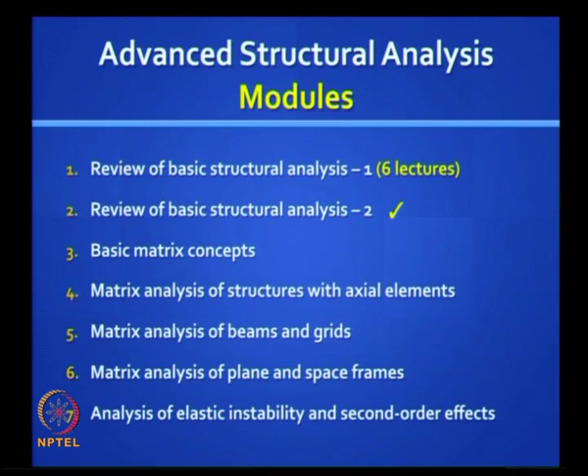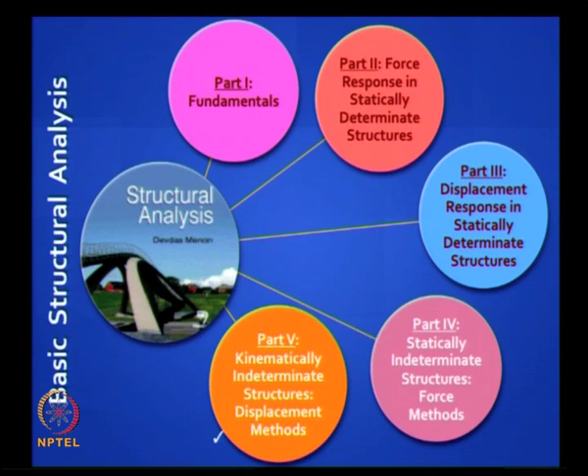We will be covering displacement methods, which we started in the last session. We will continue with the introduction and get into slope deflection and moment distribution methods.

This is covered in part 5 of this book on structural analysis. If you recall the last class, we learned about the meaning of the stiffness matrix and how to derive it from first principles. Now, can you write down the stiffness matrix for this, given that all three spans are identical, meaning they all have the same L and same EI? What will that matrix look like?

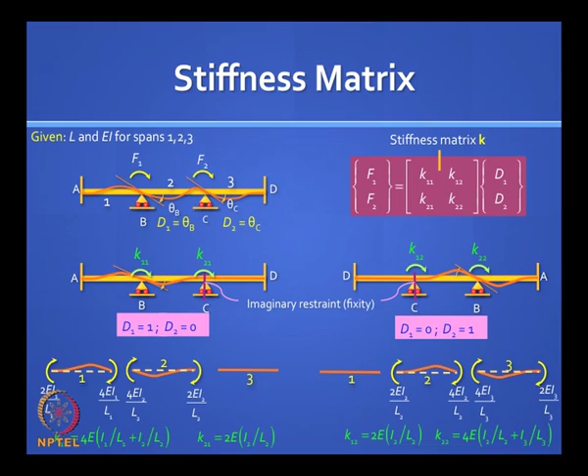Can you do it? It will be a symmetric matrix. What will it look like?

That's right. Now let's solve a problem from first principles. Let's take this beam and say it is subjected to F1 equal to F2 equal to m naught, two concentrated moments applied at the joints B and C. The challenge is to analyze this beam completely, meaning find the bending moment diagram after finding the unknown rotations d1 and d2, theta B and theta C. So the stiffness matrix for this is this.

I presume you got this from the last slide. How to proceed from here? F1 is known, F2 is known, both are equal to m naught. So just invert the matrix. Will you find out theta B and theta C quickly?

So inverting a 2 by 2 matrix is simple. The constant EI by L gets inverted to L by EI. Then you have to find the determinant, and 1 divided by the determinant comes outside as a constant. The main diagonal gets flipped over, and the cross diagonal elements get a negative sign. Am I right? Will you get d1 and d2 for this problem?

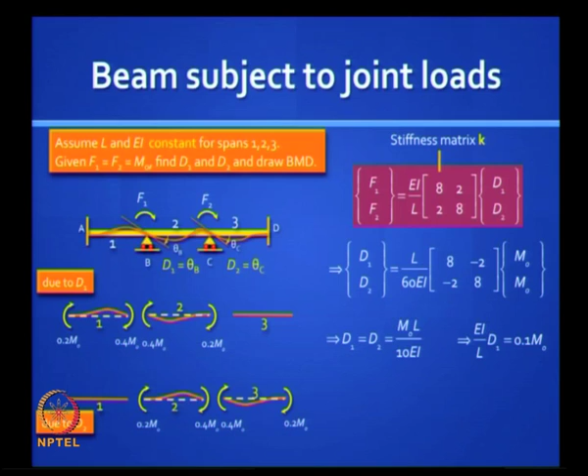It's sagging. What is the moment at B? You have to add up. At B?

How can it be? Look at this free body, the one due to D1. You agree? At this junction you got 0.4 m naught, right? You got 0.4 m naught. This is what you get.

So for element 1, that is the bending moment diagram. When you apply D2, nothing happens to element 1 because you have restrained the joint B, so nothing spills over to element 1. Is it clear? You should have no doubts about this.

I am adding those two free body diagrams, that is superposition. I am saying apply the effect of D1. Well, let us look at it from a pure displacement point of view. In the displacement method, what is your kinematically determinate primary structure? It is a structure where you arrest all the rotations.

Then you allow one at a time. We are now allowing only D1. When you allow D1, you will have bending moments only in elements 1 and 2, not in element 3. When you allow theta C, which is D2, you will have bending moments only in elements 2 and 3, but nothing in 1. Then you just add up the contributions. So in element 1, you will get bending moments only due to D1.

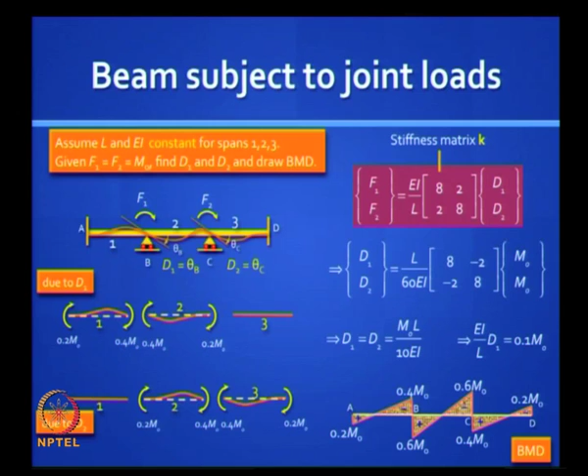Now this was an easy problem in the sense the loads were given to you conveniently as concentrated moments F1 and F2. In reality, the loads are more likely to look like this, these are intermediate loads. How will you handle this problem with the same stiffness matrix?

So we are getting into the formulation of the stiffness method of analysis, which is what we need later when we do matrix methods. How will you handle this problem?

It was easy enough to analyze the previous problem because the moments were all conveniently nodal moments, F1, F2. Here F1 and F2 look like they are 0, but instead you have intermediate loads, arbitrary loads, P1, P2, P3. How will you handle this situation?

I want you to shift the P1 to support B by adding moment and force. How do you do that?

So you are right, somehow you have to convert this problem to the previous problem. That means you have to get an equivalent F1 and F2, because you can solve by the stiffness method only if you have joint moments.

How do you do that? How do you do this conversion? It is called equivalent joint loads. How do you create that situation?

And it is nice to go through it conceptually. I want you to see how learning takes place. There are two kinds of learning. One in which you see the big picture and you develop the concept, that's a higher level of development. The second is somebody does that work for you and you just apply step by step, step 1 you do this, step 2 you solve and get the answer. We would like you to develop both abilities, see the big picture, lay down the map, and also know how to get into the detail and crack the problem, and we will do that here.

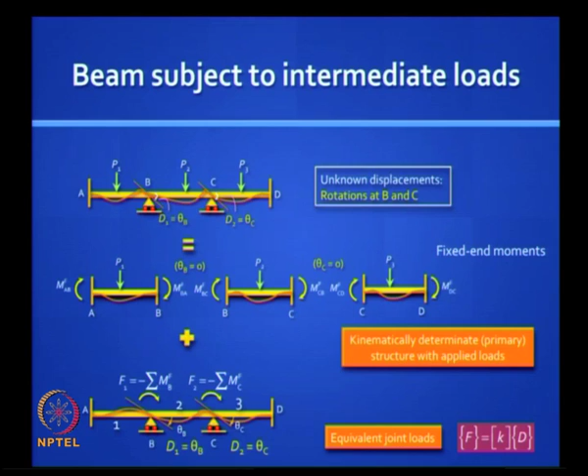This is the underlying concept, and you can use this beautiful equation, which is essentially an equilibrium equation which relates forces with displacements. So let us summarize.

The first step in the displacement method is to identify the degree of kinematic indeterminacy, take advantage of modified stiffnesses, and reduce the number, as we did earlier from 5 to 1. Identify the unknown displacements—there will be as many unknown displacements as the degree of indeterminacy.

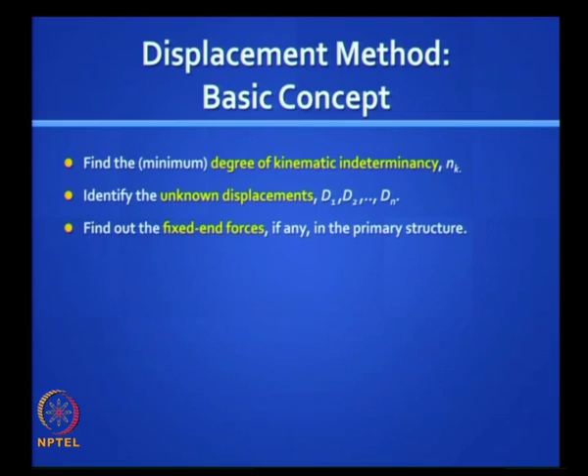Find the fixed end forces, that is, you arrest the structure if needed—meaning if you did not have any intermediate loads, you do not have to go through this step. In trusses you never need this step of arresting, because all your loads are always nodal; there is no intermediate loading there. It is only in beams and frames that you have this.

Then you express the element forces, such as the beam end moments, in terms of the displacements using a stiffness format. Remember we wrote 4EI by L into D1 and 2EI by L into D1—so you have to go through this step.

Then put it all together, identify the relevant equations of equilibrium of the structure as a whole, and so you have the F equal to KD equation—you have to bring it to this format. You know K, which is a property of the structure; F is given to you, or you find it in equivalent terms.

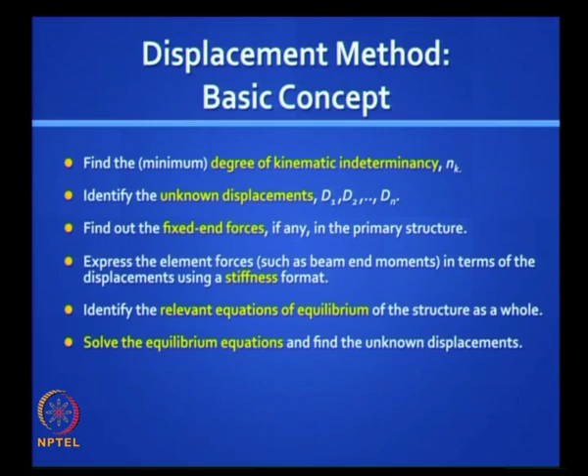Then you invert that matrix, or solve it by some system, and find the unknown displacements. You know the relationship between the unknown displacements and the end forces, so you find the force response this way.

There is a one-to-one correspondence between the path the force method takes and the path the displacement method takes. They look completely different, but they lead to the same goal, and you should be comfortable doing both methods. Now, alternatively, instead of solving many simultaneous equations, there are iterative methods which will give you directly the beam end moments.

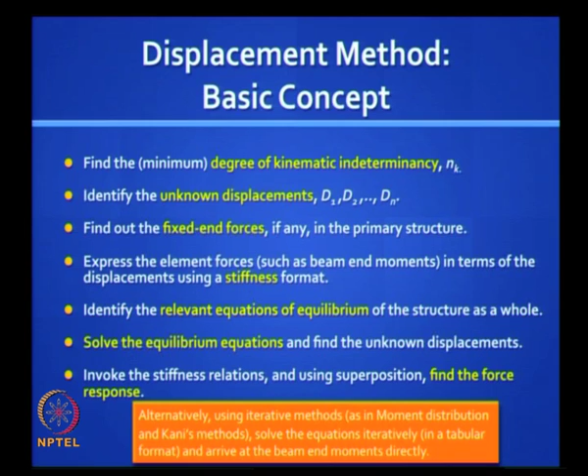So the moment distribution method and Kani's method, unlike the slope deflection method which we will study shortly, give you the moments directly. In fact, there is a question that is often asked.

Is the moment distribution method a force method, because you get the moments directly and do not need to find any unknown rotations or displacements? That is because you bypass the step of explicitly finding the rotations, invoking the stiffness relations, and just distribute the moment directly to the component beam elements—but the overall path is the same as this.

It is just that in solving the equations, you do not solve for the unknown displacements explicitly and then substitute to get the moments—you bypass that and solve it iteratively. So it is a displacement method because your governing equation is an equilibrium equation. So you need to know fixed end moments under various loading conditions.

They are available in many handbooks. In the book that I referred to, it is all available in a table, so in practice you can look these up and use them, but you should know at the very least some standard load cases like these.

The first load case is a concentrated load on a prismatic beam of span L, with load W, so the fixed end moments will be hogging at both sides, equal to WL by 8—it is symmetric. The second load case you should also know: if you have an eccentric load with dimensions A and B, it will be WAB squared by L squared, and WA squared B by L squared.

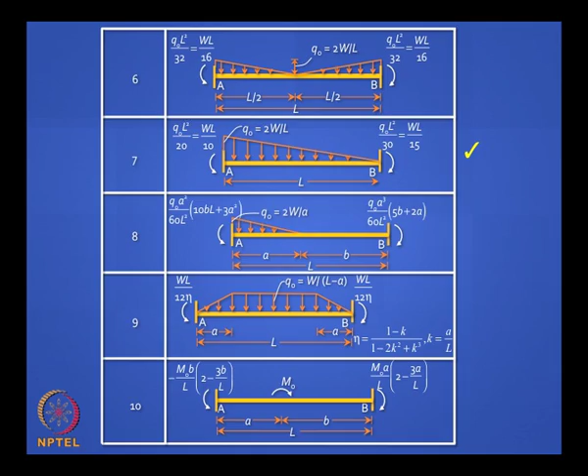Then there are some more load cases, you can skip all of them except the seventh one. Where do you encounter this triangular load distribution? Usually earth pressures on retaining walls or hydrostatic pressures. If the total load is W, remember it is WL by 15 and WL by 10. Obviously the higher value will be where the intensity is more. So remember those formulas, in case you forget them you can derive them. The others are not very important.

Now you know the fixed end moments in beams which are fixed, but sometimes you can take advantage where the far end is a hinge. So it is a prismatic propped cantilever now, and you remember I used the notation earlier, I introduced this F naught AB to remind you that at the other end you do not have fixity, it is a release.

Do you need a separate set of formulas for these, or can you pick them up from the fixed beam using a simple logic? Let us take the same beam and fix the end B. You are supposed to know the fixed end moments MFAB and MFBA. How is MF naught AB related to MFAB and MFBA?

All you need to do is add to this another picture where you reverse MFBA. When you do that, at end A you will get a moment. What is the moment you get? MFBA by 2, we have studied that, and it will be anti-clockwise. So you get MFBA by 2.

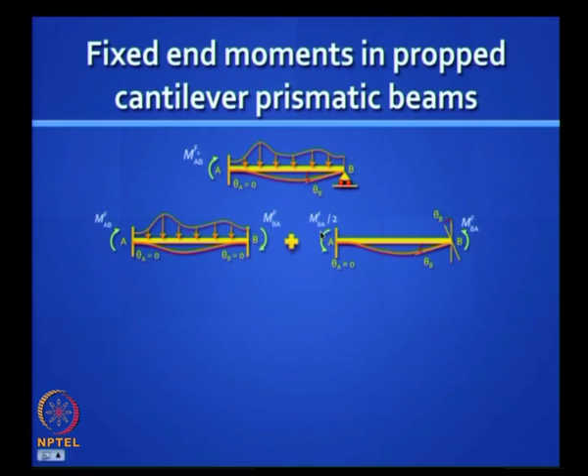So when you do superposition, obviously this is equal to this minus that. If you see it as clockwise positive, it will usually add up, and if it is a symmetric beam, or let us take a case like this, you can easily work it out. So it is easy to remember. If it is symmetric, it is even easier. What is it?

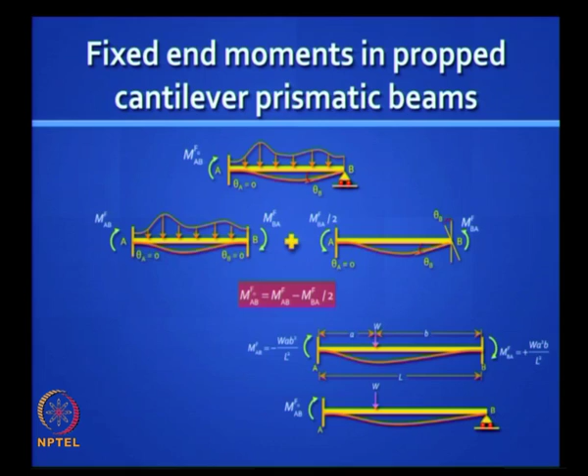It will be, yeah, the additional thing is a half, so the final thing is 3 by 16. Come on, you can work this out. It will be 1.5. You got 1 and you got half extra from the carryover. Is it clear? Easy to remember. So you must take advantage of this.

Now let us quickly do the same problem we attempted earlier, but with not a concentrated moment at O, but with all kinds of loads all over the place. We will do it fast because you are not going to actually do problems of this kind, but I want to show you it is not difficult. You still have only one unknown rotation, theta naught.

So here now, what is the first thing you have to do after identifying theta naught? You must arrest that rotation at O and you will get fixed end moments. You have to separate out those 4 beams. So let us take the first one. If you separate it out, MFA naught will be having a negative value because we are taking a sign convention that clockwise moments are positive.

So can you write down the value of MFA naught for this loading condition? It is equal to minus of 80 into 3 divided by 8. And what about the second case?

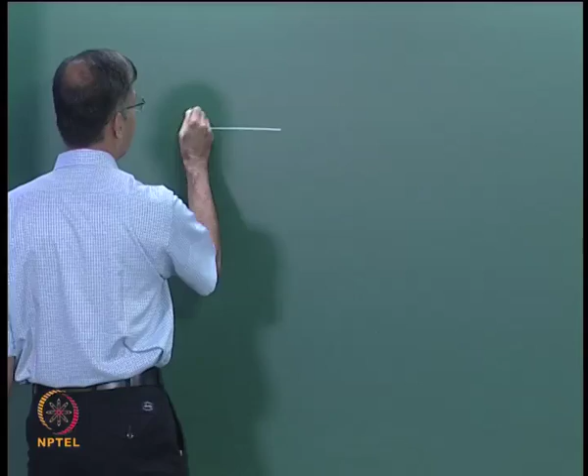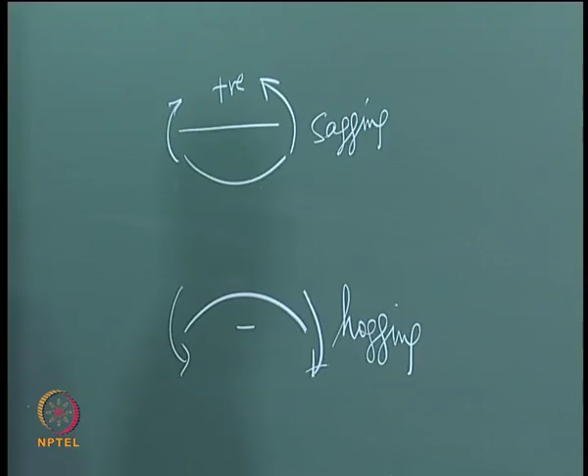Our earlier sign convention was if you apply moments like this, it will bend like this. This is positive and this is negative. This is sagging, this is hogging, which we will still use when we draw bending moment diagram. So let this convention be there.

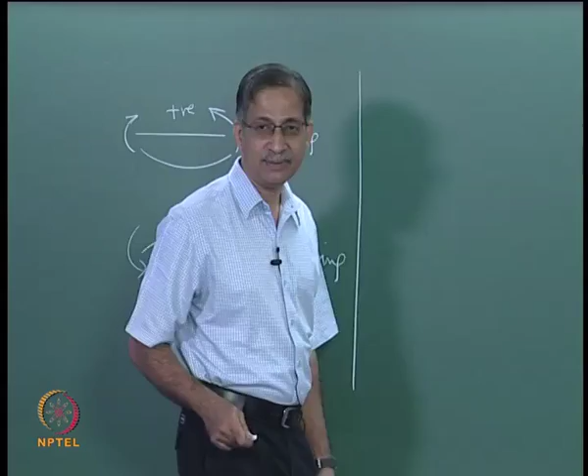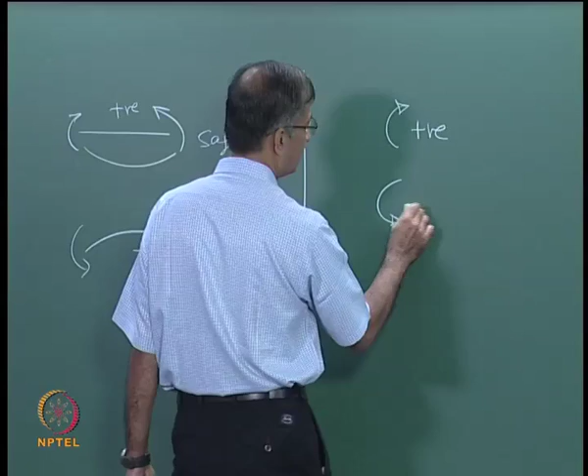Now for the sake of analysis, we are using a different convention. The convention we are using is clockwise, whether it is on the left or right, is positive and anti-clockwise is negative. Historically this has been the convention. So you will see this is positive as far as the beam end is concerned and this is negative.

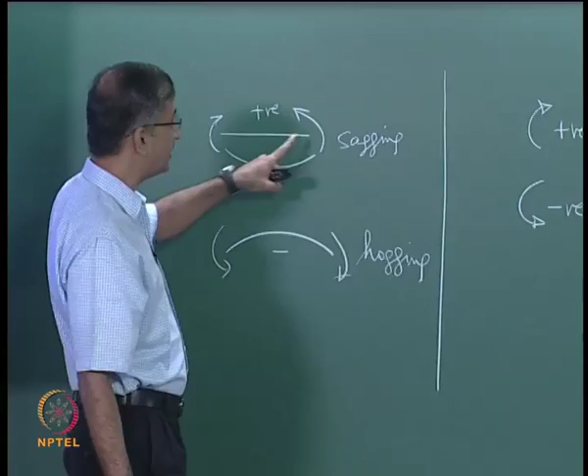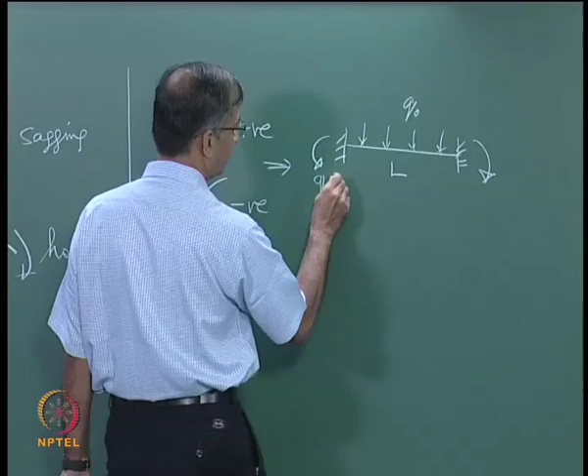So using this convention, let us say you have a UDL, q naught L, you can write it, this is the correct answer, we all know that, but you will write MF, let us say this is A and this is B, you will write MFAB as minus q naught L squared by 12

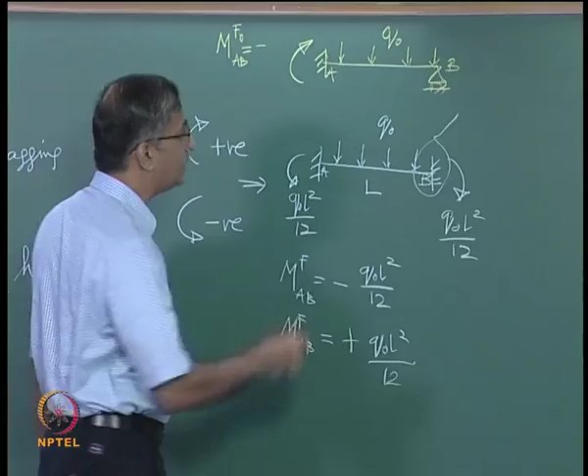and MFBA as plus q naught L squared by 12, and if by chance this end were to be a simply supported end with the same loading, A, B, q naught, then the notation we will use clockwise positive is MF naught AB, and this will turn out to be minus 1.5 times this, which is q naught L square by 8.

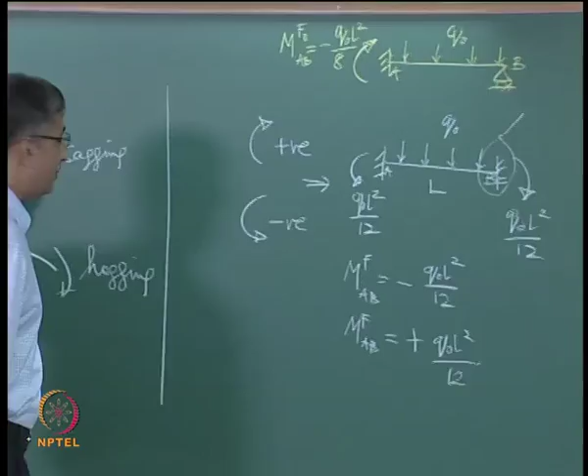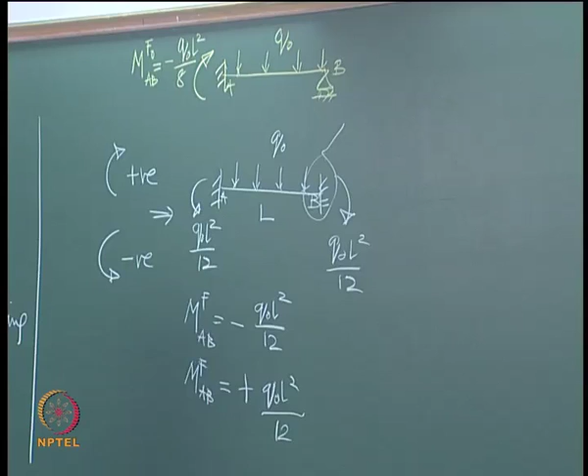Is it clear? These are the sign conventions we will follow. After we draw the final end moments in free bodies, then when we draw the bending moment diagram, there we put plus and minus in the bending moment diagram. But for analysis by displacement method, we will follow this convention. Later we will reverse this convention for a very important reason which has to do with vector algebra. Okay? But traditionally this is how it has been done. Is this clear? All of you are clear?

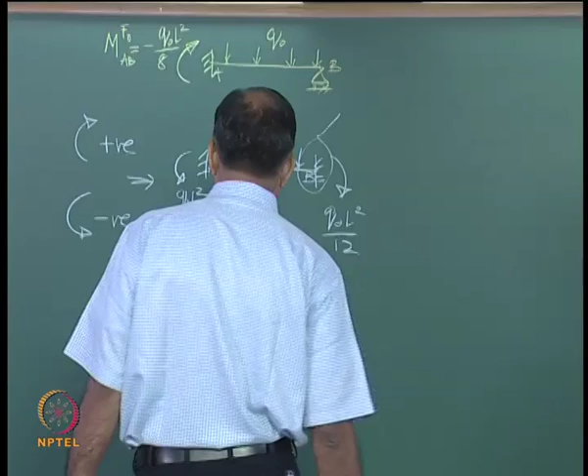Now the second case is interesting. We are trying to take advantage of that guided fixed support. So how will you solve that problem? So now we are saying, let us say you have a problem like this. Wonderful, you are right. Let us say this is q naught and say this is A, this is B and this is L.

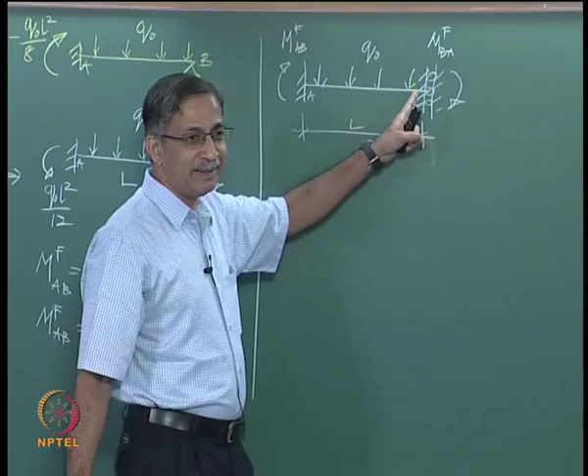I want to find out these values. What is MFAB and what is MFBA? Perfect, he is right. So remember, whenever you see a picture like this, it reminds you that there is a mirror image on the other side which will give us the same condition, because this deflected shape will be like this,

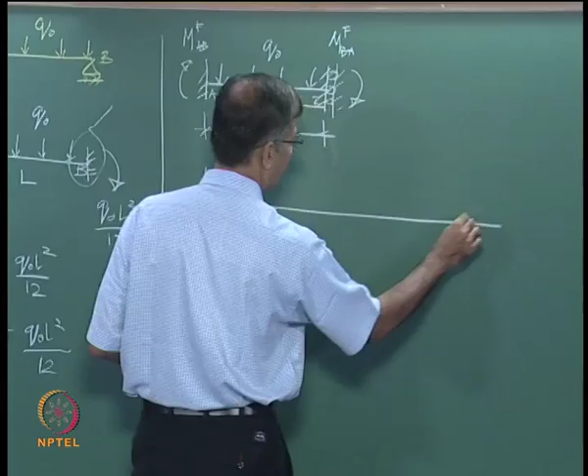and if we had a beam which was twice this length, 2L, with the same loading, q naught, that would deflect in much the same way, and here right in the middle you have that condition of symmetry which is usually shown like that.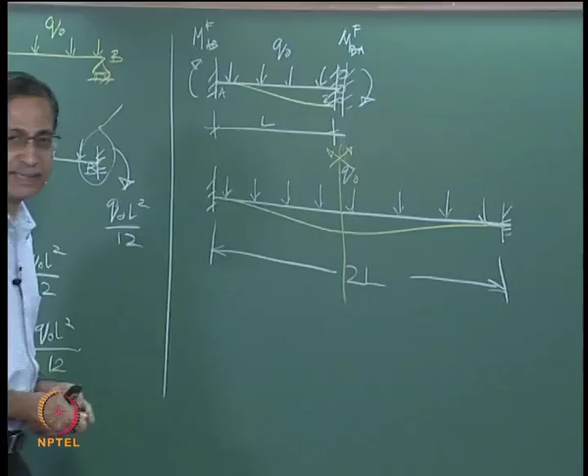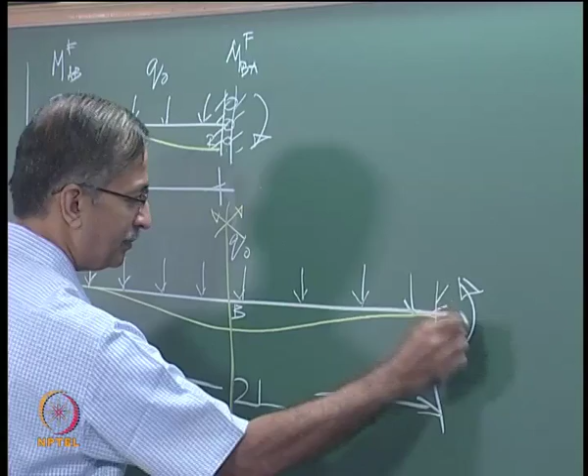So you can work backwards, this we know, these answers do not change. This we know, let us say this is B and this is C. So MFAB does not change, and if you remember the bending moment diagram here will be, right, hogging, hogging, sagging. This moment is Q naught into not L, 2L the whole squared by 12, and what is going to be this moment at the middle?

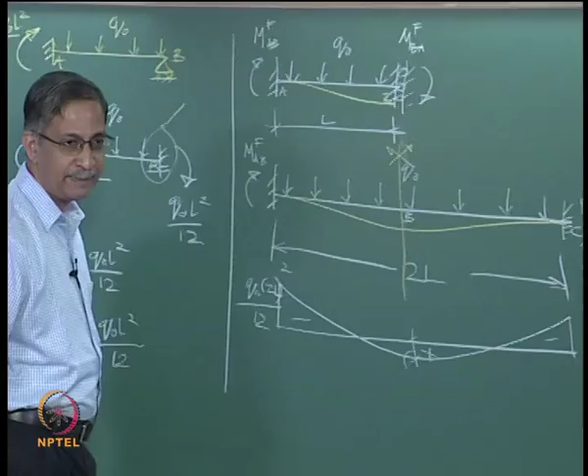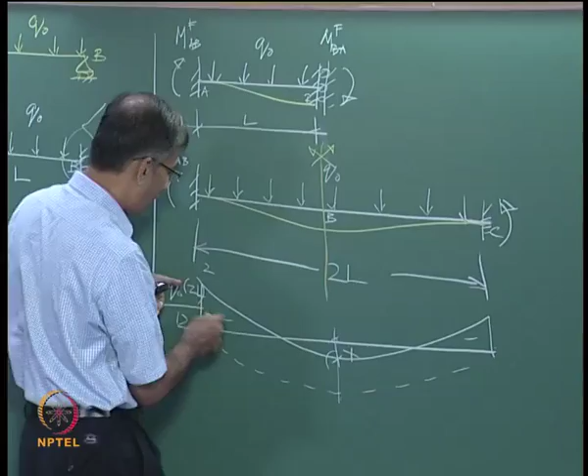Well, remember, if it is simply supported, it is the same curve like that. What will be this value? Q naught into 2L the whole squared by 8. The whole curve gets lifted up by Q naught 2L the whole squared by 12.

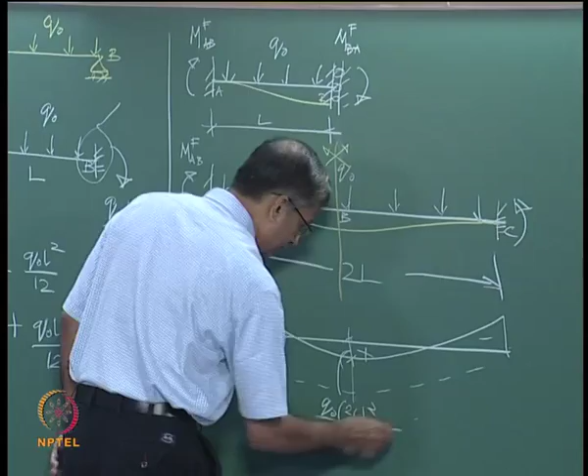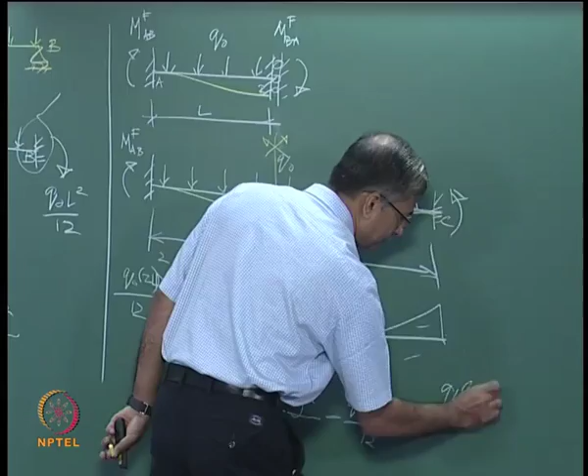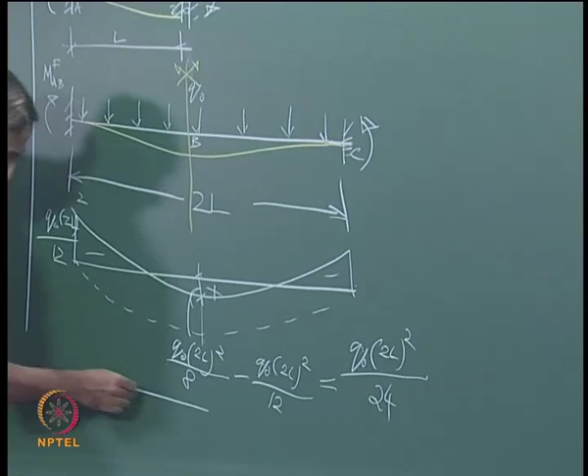So remember that, you might forget but you remember, it is Q naught 2L the whole squared by 8 minus, which turns out to be, that is right, by 12. If you remember the final answer, go ahead and do it straight away, 24. And it is important to note, when you break it up into 2, this is going to be hogging, this is going to be sagging, remember.

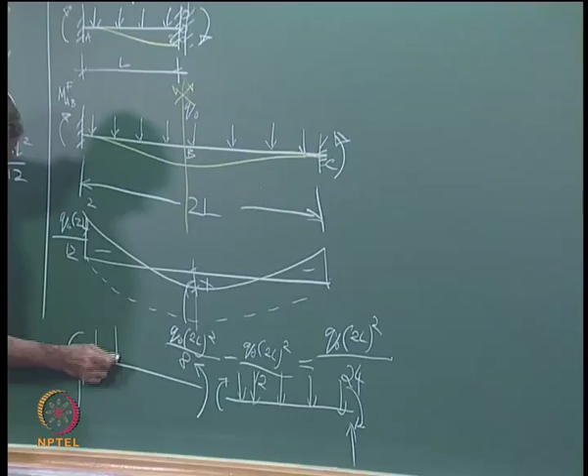Does it make sense? And there is no shear here, but there is a shear force here, there is a shear force here, which will equilibrate with the UDL. Very interesting, not very well known. Is it clear?

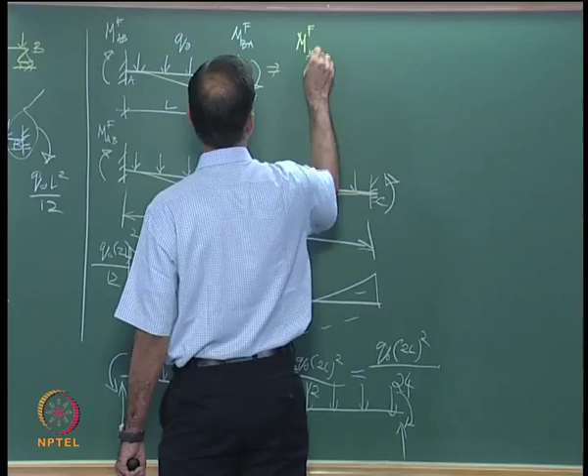So at the end of the day, what are the answers you will write? For this problem, MFAB will be minus or plus? Minus, it is hogging, right? Minus Q naught, not L squared, again you are making the mistake, 2L squared by 12, and

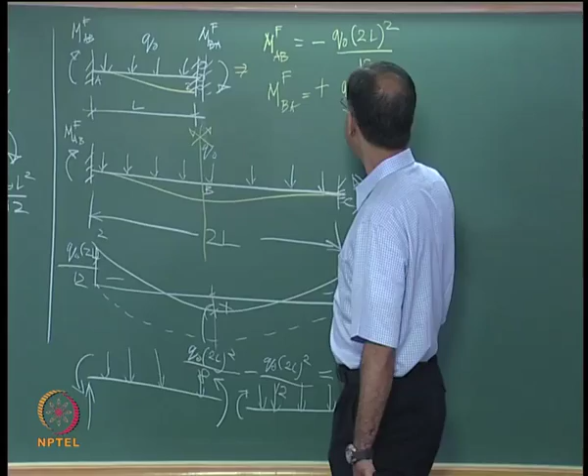MFBA will be what? Well, you can write this equation if you wish. Is it plus or minus? Plus, it is sagging. It is plus Q naught by 24, which is just half that value. You got learned something here. Okay, so this is very interesting, and that's how we get those answers here.

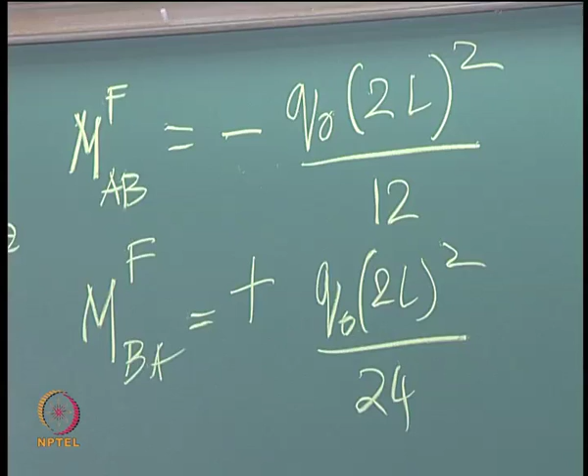MFBC, you can see here, MFBC is minus Q naught L squared, 2L the whole square, right? L is 3, 2L is 6, and this is half that, and I think there is a mistake here. This should be, no, it's right, it's right, it's right. This is right, please note. This is sagging, which means it's this way, which means it is minus. It's right?

Look at this picture. This is sagging, so this is anti-clockwise, which in this sign convention should be minus. So this is a rare case where not only this is minus, but it's minus on the right side too. Usually it's minus and plus, left side minus, right side plus under gravity loading. This is one rare case where the right side is also of the same sign as the left side, which means both are minus.

Have you understood? There is another rare exception, I might as well point it out. Let us say you have a concentrated moment m naught right in the middle of a beam. The deflected shape will be, right, deflected shape will look like that, and MFAB...

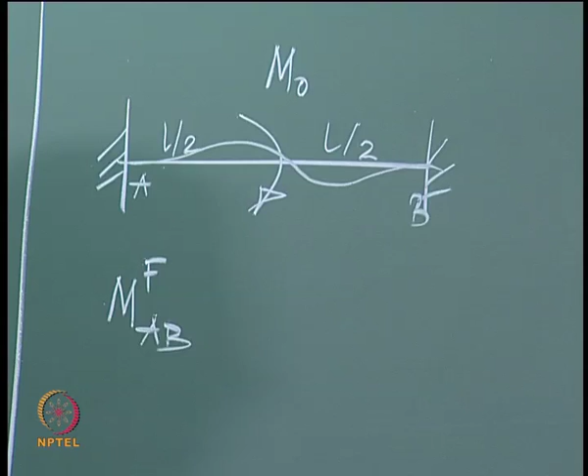What do you think the direction here will be? Clockwise or anti-clockwise? Clockwise. This part looks like it's being lifted up, so it will be clockwise, and this, it's being pushed down, will also be clockwise. So this is another rare case where MFAB is equal to MFBA, and the answer, worth remembering, is m naught by 4.

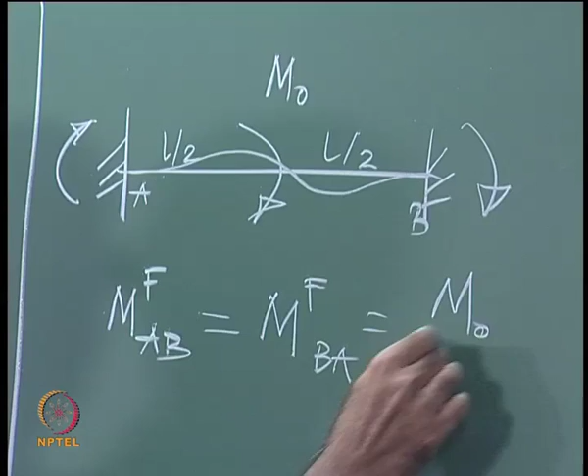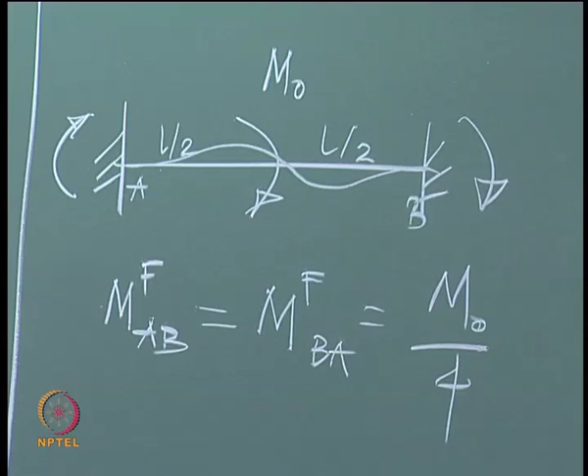Some standard cases worth knowing. In the table I have given you a generalized formula where that concentrated moment is located anywhere in the beam, but in the middle it will be m naught by 4. So far so good, can we proceed?

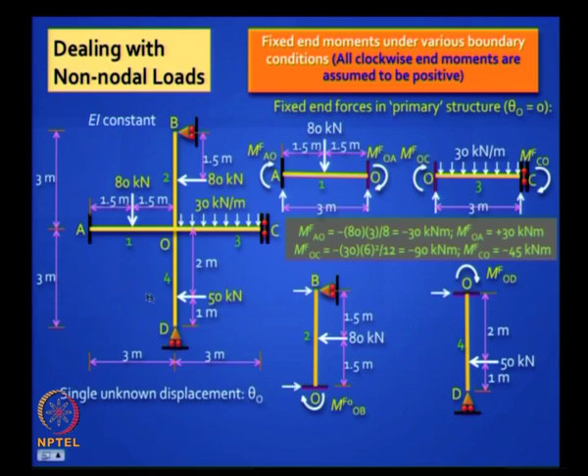You take these two remaining cases, take this case, is this beam where you have a roller support on top. So this is easy to calculate. What is the answer? MF naught OB will be 1.5 times what? WL by 8. So 1.5 times WL by 8, and it's positive because you have to rotate it and then you'll realize why it's positive.

Got it? Is it clear? Isn't it positive? Do you have a doubt on that? Not clear to you? No, okay. Is it crystal clear or not?

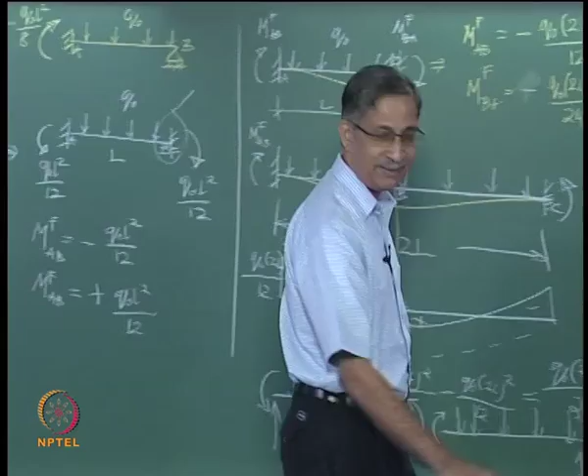Okay, so here you have a situation where that beam is vertical. You have a case like this, right? You have arrested this end, and this you propped, though it's shown like this. Where is your load acting? The load is acting here. What is the deflected shape? All this you should bear in mind. It's like this.

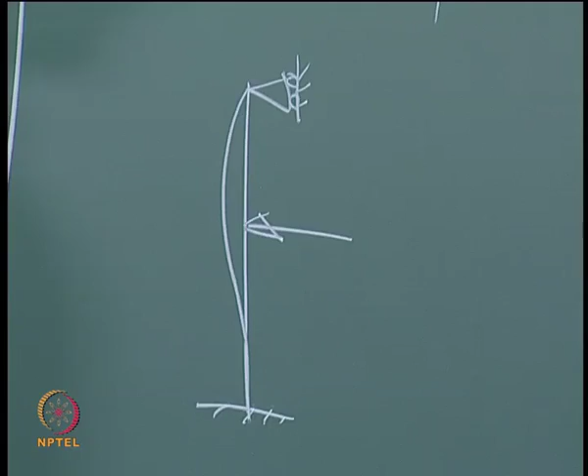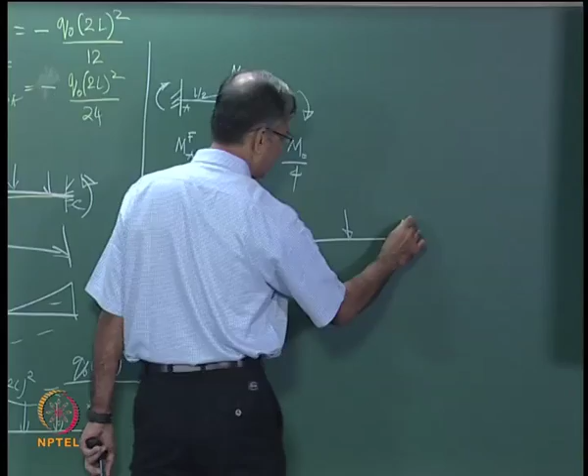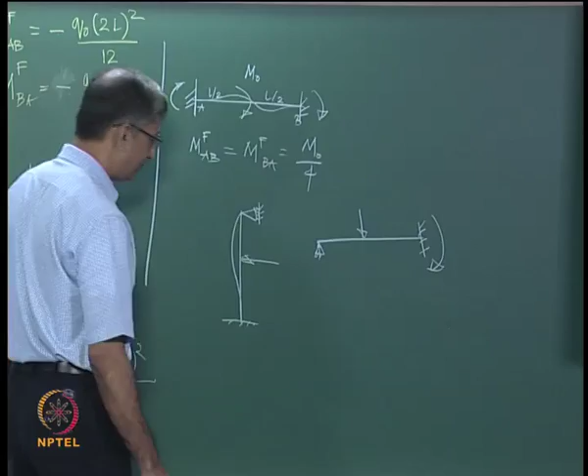So you can turn it over if you are more comfortable with this situation. Okay, now you don't have any doubts. This is going to be always clockwise. Is it clear? Are you okay? So don't make mistakes with signs, it's very important. Got it? So MF naught, all these are easy to calculate.

Now if you add up all the moments that accumulate at joint O, you will get something. In this case you get minus 115 kilonewton meters. So this is the equivalent joint load, which you can handle easily.

Now let me take another case where, don't worry, don't take this down, I just want to demonstrate, where you also have in addition a concentrated moment here and here of 45 kilonewton meter. Now this picture looks scary, is it not? But you are brave warriors who have learned displacement methods, and you will first recognize this is symmetric.

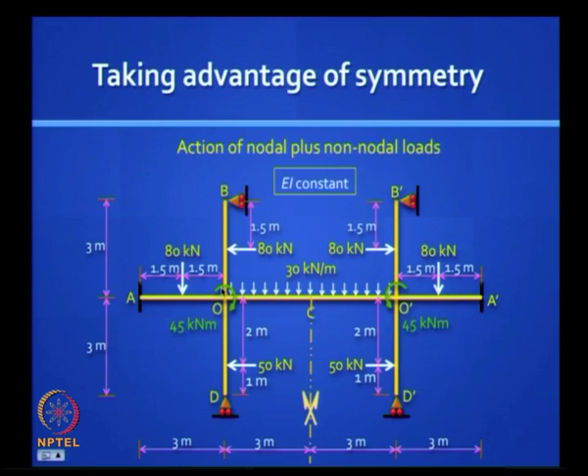And you will say if you cut one half, you will do what we did in the previous slide. The only change is you have an additional concentrated moment 45, which you have to add, and 45 and 115 when you add, because you have to put a negative sign, you get 160, and this we have done in an earlier class, and you can solve the problem.

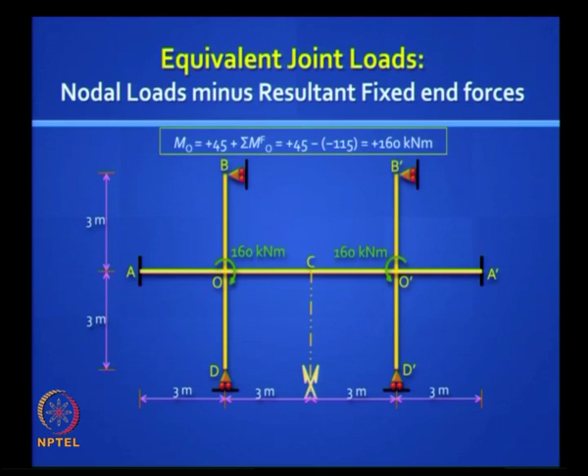Is it clear? So you have to use your brain. You can't say I am sitting there, it is not coming naturally to me, until you have learned to master this subject. Clear? Okay, and don't forget there is a fixed end force diagram which you are supposed to add to the diagram that you get from the nodal moment. Then only you get the complete solution, because the actual problem is a distributed load problem, and don't forget to add that.

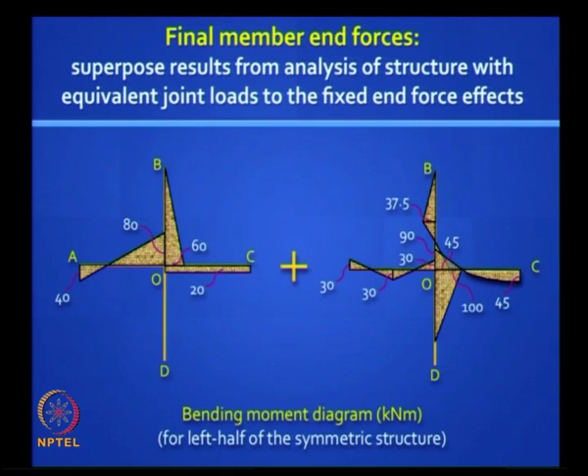One last point to note before we start the slope deflection method: what happens if you have, in addition to rotations, you have translations? So let us take the same beam element, and we have two types.

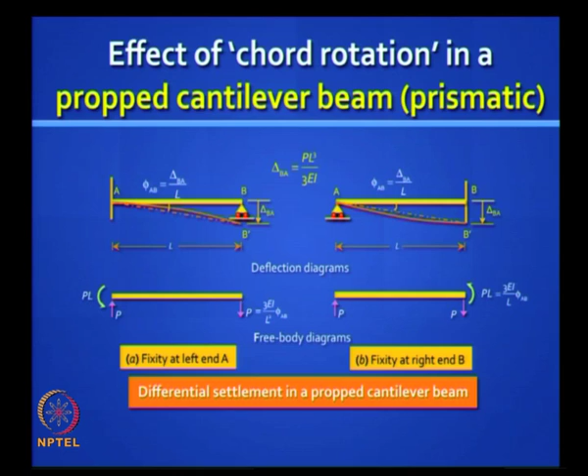What is P? How is it related to delta? Delta is PL cubed by 3EI, you are right. So that is how you get this relationship, and if you substitute you get 3EI by L square into phi, and this is your answer. Your fixed end moment is 3EI by L into phi, or 3EI by L square into delta.

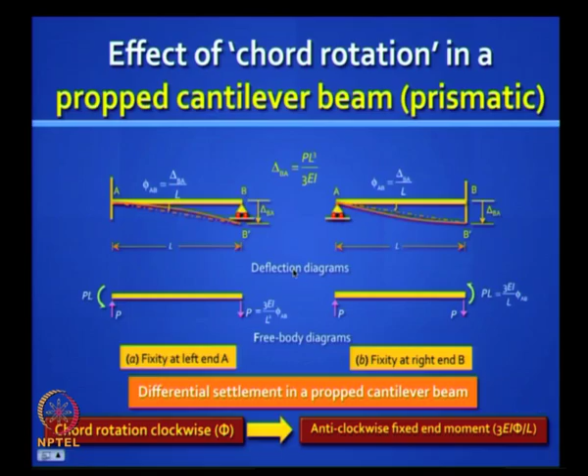Is it clear? It is very interesting to note that you have a clockwise rotation here, but the moment you get is anti-clockwise, clockwise chord rotation. Now I want to ask you a question. This 3EI by L is familiar to us. You get 3EI by L in a propped cantilever when you apply a moment, unit rotation, is it not? There is a 3EI.

Is that 3EI by L and this 3EI by L related? Is it related? There you had a flexural rotation, here you have a chord rotation. Is there a relationship? Can you give a physical meaning to it? We will try. You try. So we will do it in a clever way.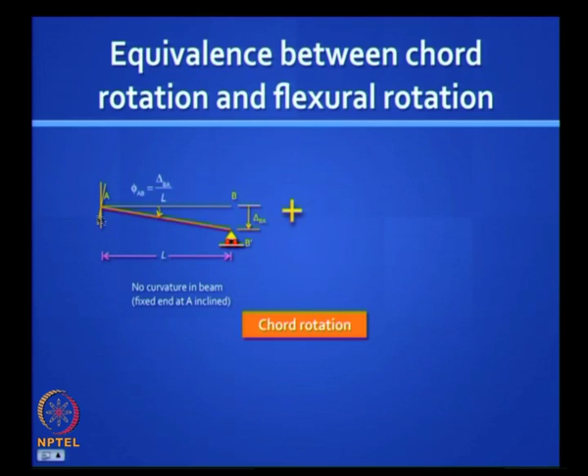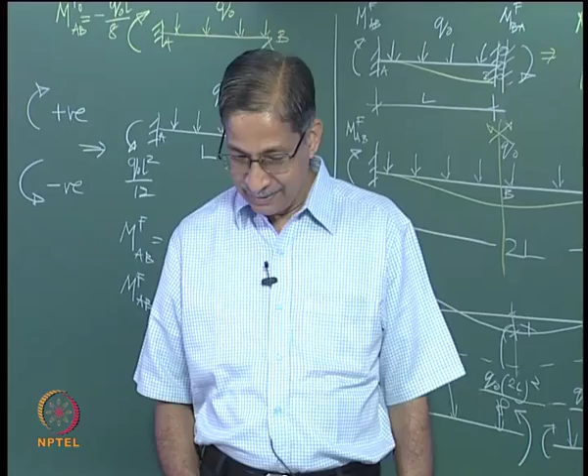Let us say originally itself this was straight, okay. Now what do you need to do to get the other picture? You have to rotate A in the anti-clockwise direction. That means you are now visualizing a rotational slip. You do that and you get the same shape we got earlier, and when you do this, what is the reaction moment that you get? 3EI by L.

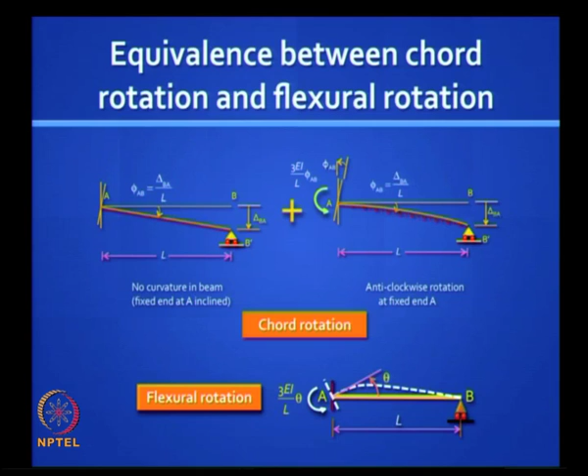So you know there is a one-to-one similarity, and this is very interesting, and you can use either interpretation and get the same answer. Similarly, if you have, we have done this recently, if you had both ends fixed, what is the fixed end moment that you get? Instead of 3EI by L into phi, you get, you do not get 4. You don't get 4, you don't get 3, you don't get EI by L, you don't get 2 EI by L. You are trying all permutation and combination.

Let us do it this other beautiful intuitive way. We incline both the supports, we rotate one. When you rotate one, what's the moment you get there? 4 EI by L, and what do you get on this side? 2 EI by L. Then you rotate this also. What do you get here? You get 4 EI by L and you get 2. What do you get totally? 6 EI by L, right?

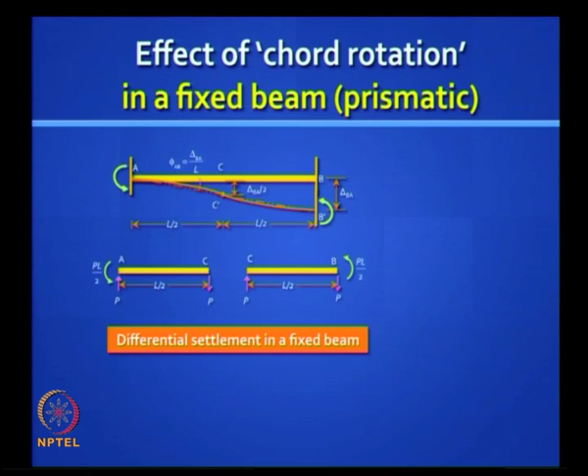So you got that number 6 and you can prove it. You can prove it, and it's very easy and very elegant. You can also do it from deflection, saying that the deflection in the middle is delta BA by 2. Remember? So you can prove this easily.

So in general, when you see pictures like this, you look for chord rotations. If the chord rotation is clockwise, you get an anti-clockwise fixed end moment. It's either 3 EI by L if the far end is hinged, or it's 6 EI by L at both ends if both ends are fixed, right, and vice versa.

Okay, now we start with the slope deflection method. Let me just introduce it to you. It was formulated by George Maney in 1915.

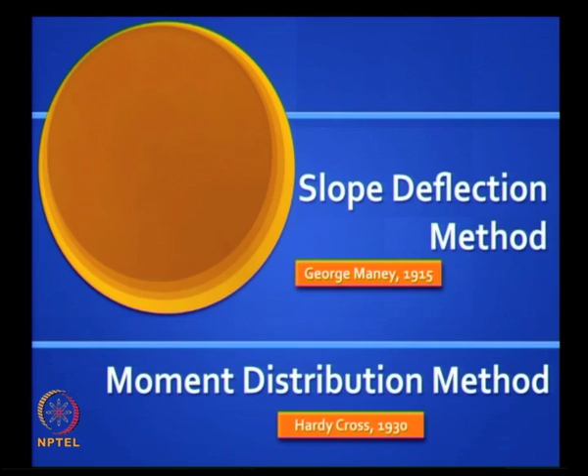It's the foundational method, it's where all the displacement methods started. Subsequently Hardy Cross in 1930, a professor at Illinois, suggested a simple method called the moment distribution method, and parallelly in West Germany Gaspar Kani proposed his method called Kani's method.

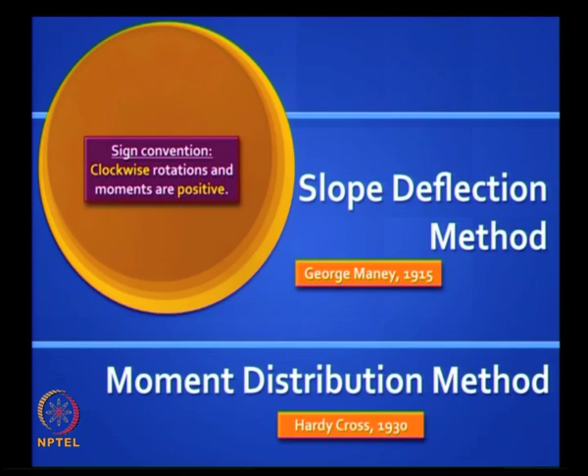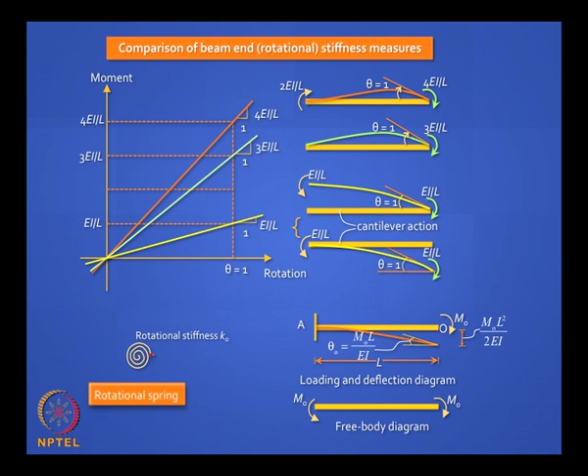Throughout this we will assume a sign convention, which I have already mentioned: clockwise moments and clockwise rotations are positive. And you will recall that if you want to take advantage of reduced indeterminacy, you can play with those stiffness values: it's 4EI/L, 2EI/L combination, or it's 3EI/L and 0, or it's EI/L and minus EI/L. Is it clear? So you remember this.

Now this is how George Maney proposed this method. He derived some basic slope deflection equation for a prismatic beam. Let us imagine you have a continuous beam, or a beam which is part of a frame, it's the same thing, it doesn't matter. Let us take a continuous beam, and take some intermediate beam in that system called AB. You remember we wrote the three moment equation earlier, well it is similar to that.

Let us imagine the worst kind of loadings possible, very messy intermediate loads. Let us also assume that this support deflected by delta A and delta B, and let the deflected shape be this funny shape for the beam element AB. We are trying to preserve in this shape some sign conventions.

Three sign conventions we have preserved for theta A, theta B, and rotation, chord rotation phi AB - all are clockwise. The shape I have shown: theta A is clockwise, it is a flexural rotation; theta B is clockwise, it is a flexural rotation; and chord rotation for that entire strip phi AB is also clockwise.

Can you see that? I have assumed delta B to be more than delta A. If delta B is equal to delta A, then that chord does not rotate at all, you don't have a problem, you don't have differential settlement.

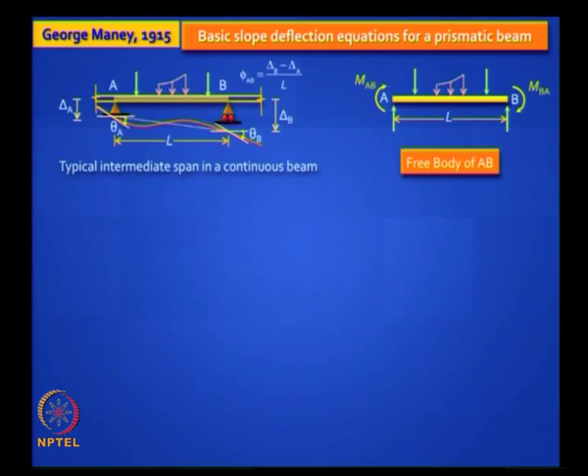We can. How do we do it in displacement formulation? You have to first arrest your structure - kinematically determinate structure is one in which theta A and theta B are both zero. So you catch hold of theta A, theta B, artificially pin them down, arrest them so that they do not rotate. Then due to the loads you get fixed end moments, which you are supposed to know how to calculate, right. So no chord rotation, no flexural rotation, you know how to get MFAB and MFBA, clear.

Next what do? Release theta A, see you are rediscovering, reinventing this beautiful method. So release theta A, let it rotate. When you do that, what is the moment that you get? Far end is fixed in this case, it will be 4EI/L theta A and 2EI/L theta A on the other side, agreed?

So we have to superpose these, then we have to superpose two more pictures. What is the next thing we will do? Release theta B but arrest theta A, because we are going to do superposition. We will do that and you will get this, very straightforward. Finally you have to do one more picture. What is that?

Take the primary structure and don't forget there is a chord rotation. Give that also, then that completes the picture. Fix them, allow that chord rotation, delta A comes down, delta B comes down, there is a rotation phi AB. And the moments are - if you have a clockwise chord rotation, you have anti-clockwise moment 6EI/L into phi AB. Is it clear?

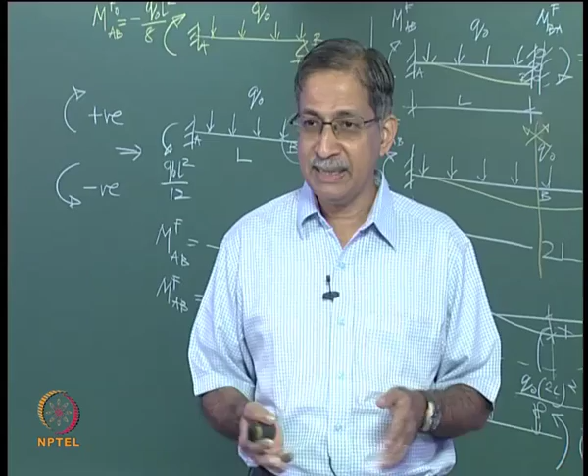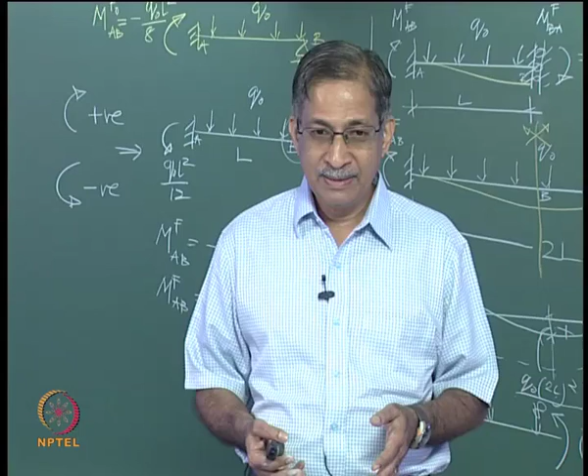Now can you write down equations for MAB and MBA? What will they look like from these four pictures? If you add up these four pictures, you get back the original picture, both in terms of the force field and the displacement field. So won't they look like this?

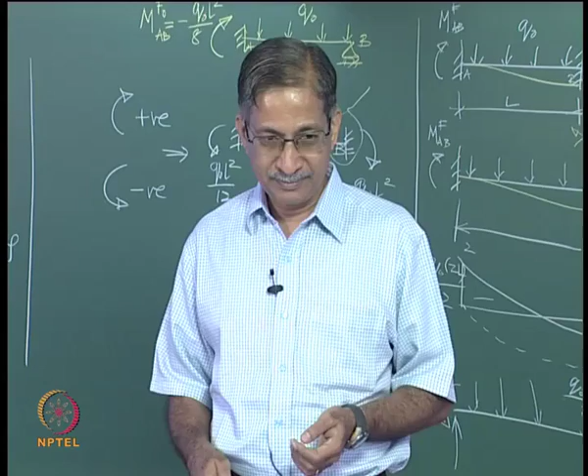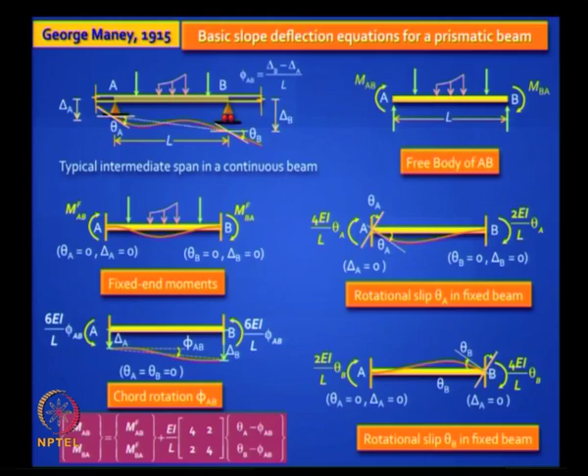MAB is MFAB plus 4EI/L theta A plus 2EI/L theta B minus 6EI/L phi AB, which can be written in this format. MBA is MFBA plus 2EI/L theta A plus 4EI/L theta B minus 6EI/L phi AB. So we will stop here with this introduction. Thank you.